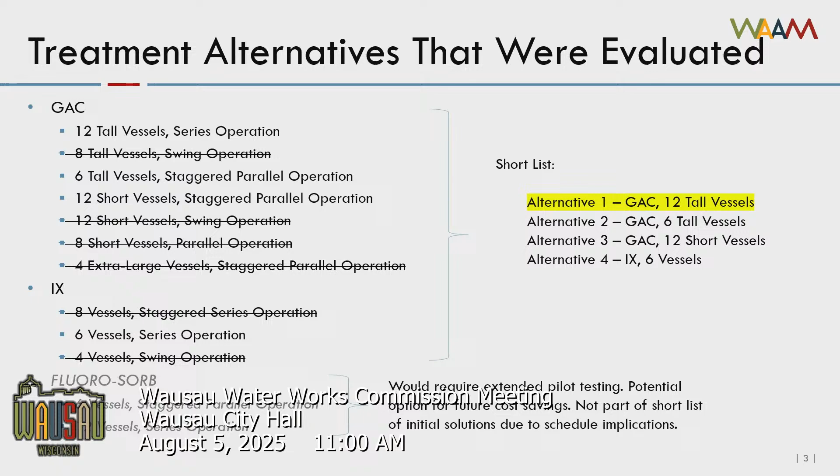Ultimately, we selected alternative one, which was 12 tall vessels for granular activated carbon. The reason for that was to give the city the most flexibility in the future, in that the tall vessels can not only use granular activated carbon, they can use ion exchange media, and they can also use some of these emerging adsorbents like Fluoro-Sorb. And the one thing with the Fluoro-Sorb is what we're being told right now is that costs are potentially less than granular activated carbon. It just has not been used in Wisconsin yet.

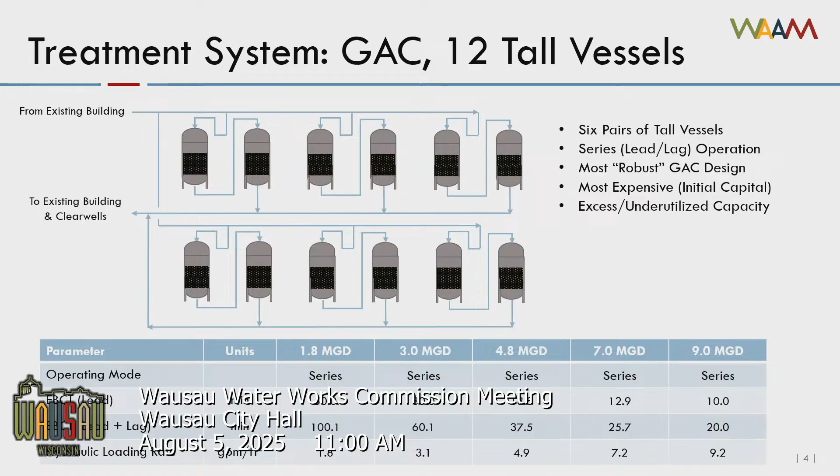So the treatment system that is in place that was started up last November has the 12 tall vessels. This just shows a little more detail on it. The water comes in from the existing treatment train and the ion exchange system. The ion exchange system is there to remove the color in the water and also the total organic carbon. And it was used on an interim basis to remove PFAS.

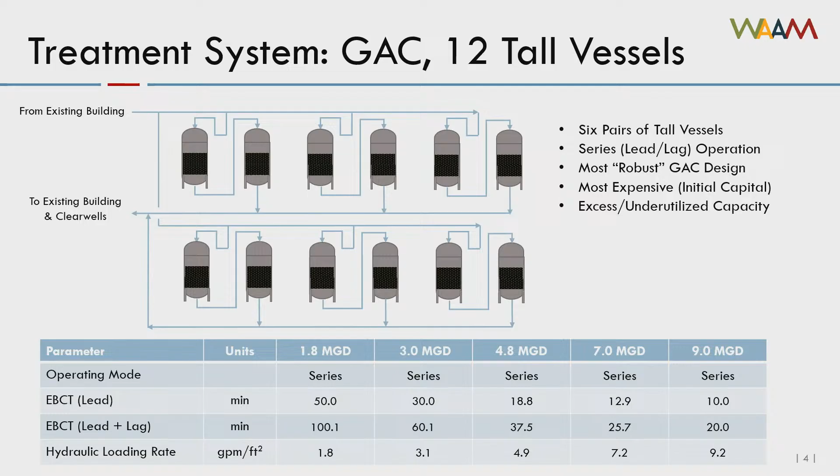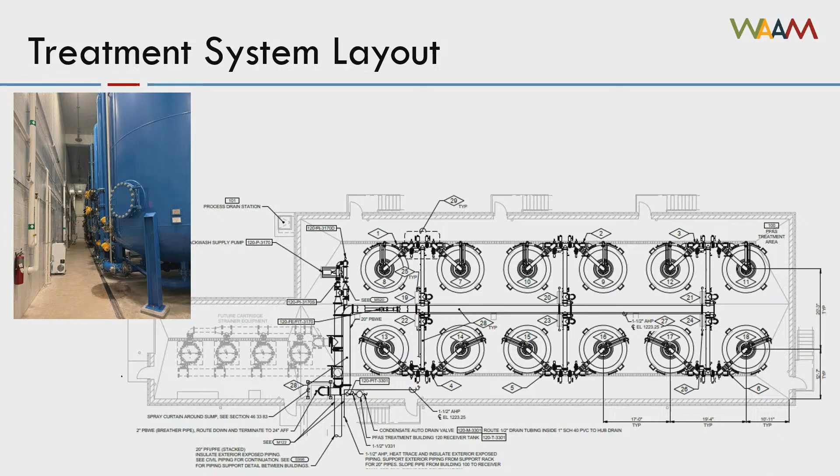This just gives you an idea of what the vessels actually look like. They're really hard to take a big picture of because they're pretty big. But there are 12 vessels right now in the new treatment facility that was constructed adjacent to the existing drinking water plant building. Those treatment vessels operate in a lead lag configuration.

So what that means is that from the ion exchange system, the water goes into each one of the 6 pairs of vessels, and the lead vessel is what we call the working bed. And then a second vessel, the lag vessel. You can see the flow path there. So the water comes in, it goes into, for example, vessel 1A. That's what we call the lead vessel, and then goes to vessel 1B, which is the lag vessel.

We are monitoring throughout the vessel beds. Right now, our focus is primarily on that first lead vessel because that's where the removal is happening, although some PFAS is still going into and will ultimately load the lag bed.

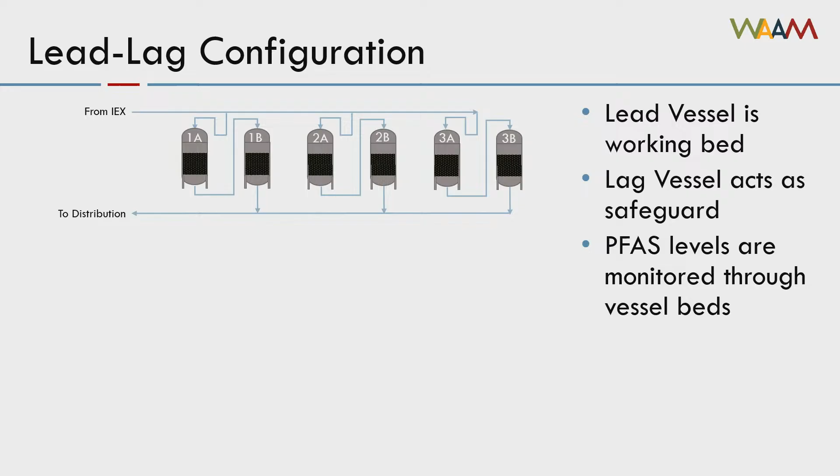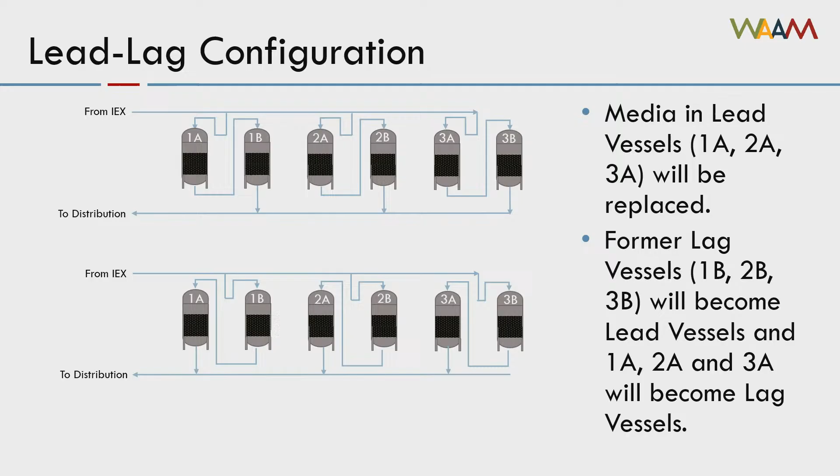So this is just showing what happens when we change things over. With the lead lag operation, once you replace the media from vessel 1A, for example, then the flow is basically reversed so that 1B becomes the lead vessel and 1A then is the lag vessel. So you're always just flip-flopping that operation.

This depicts the sampling strategy that we're using, and you'll see some references in the presentation to where those sample ports are located. There are 4 sample ports for each vessel. The numbers depict the bed depth, so 25, 50, 75%, and then 100%, which is all the way through the bed of the carbon.

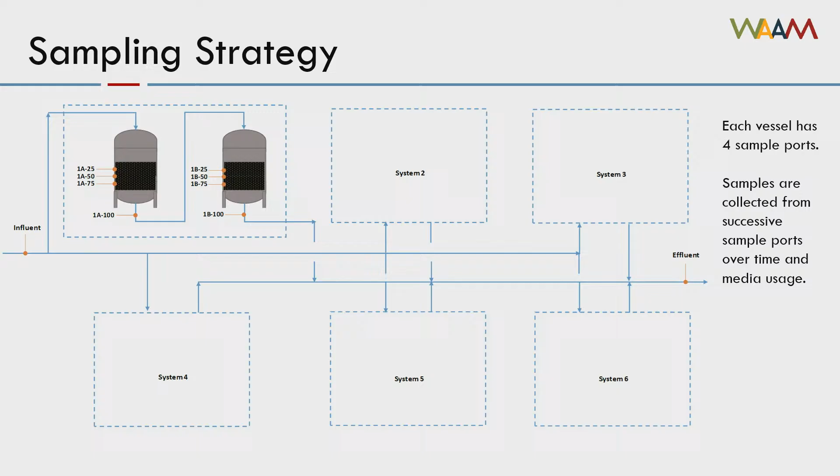And so the sampling has been going on for months now, and on a monthly basis, the samples are collected from a series of ports, depending on where we're seeing the PFAS levels advance through the vessel.

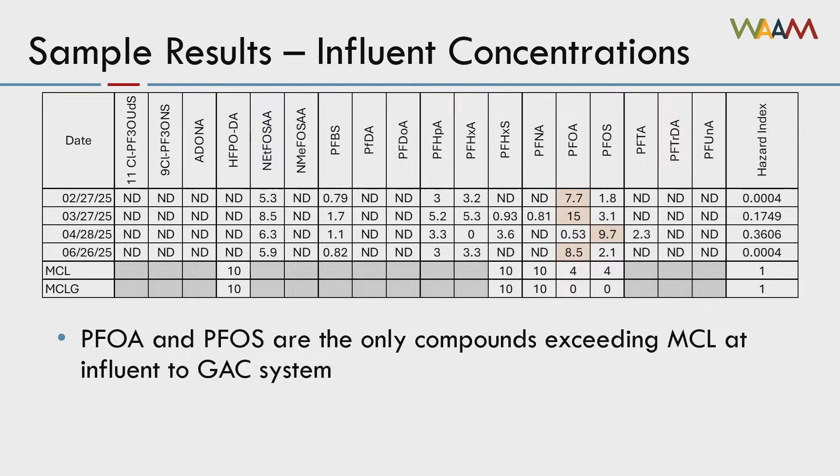This slide is just showing some observations on the different compounds that we're sampling for. There's 18 compounds that are sampled for at each location. What we're really seeing is the PFOA and PFOS that's coming through. And I was just curious, some of these compounds have different number of carbons with them, and so generally the thought process is that the shorter carbon chain compounds will break through first.

And so I was just kind of curious, and that's all the slide is depicting, is just we are seeing the PFOA and PFOS coming through the bed, but we're not seeing some other compounds come through the bed.

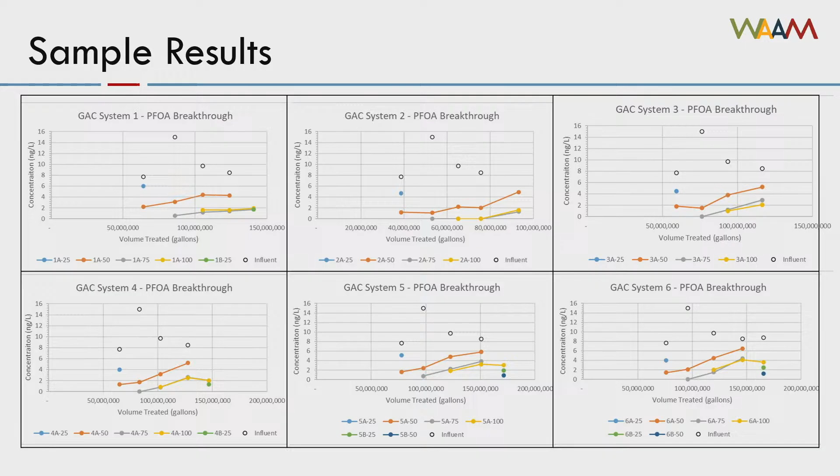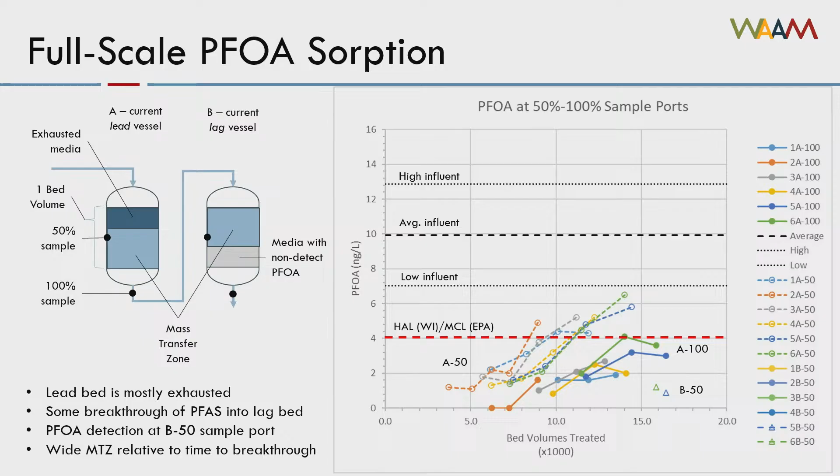And so this next graph is really just trying to show what we're trying to track, which is how many bed volumes, or how much water can we move through each vessel and still effectively remove the PFAS. But of course, the big question is, well, to what level are you removing it? Is it non-detect? Is it 4? Obviously 20, as you saw in the influent samples, we don't have anything over 20, so that's not of concern.

But that's a discussion we need to have. We're getting to the point of needing to think about replacing the media, and what is our goal here is really the question.

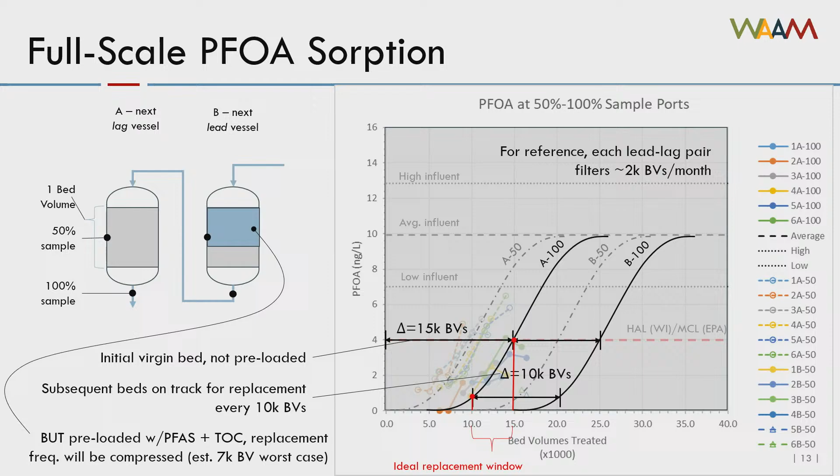I did talk with DNR. Right now, you would only be required to public notice if you exceeded 20 parts per trillion, which is the health advisory level that was most recently adopted in Wisconsin for PFOA and PFOS. They are expecting that to change, of course, but their big concern is not to get ahead of where EPA is with their rulemaking. And of course, we've recently heard that EPA is anticipating kind of backing off on their timeline, which was discussed.

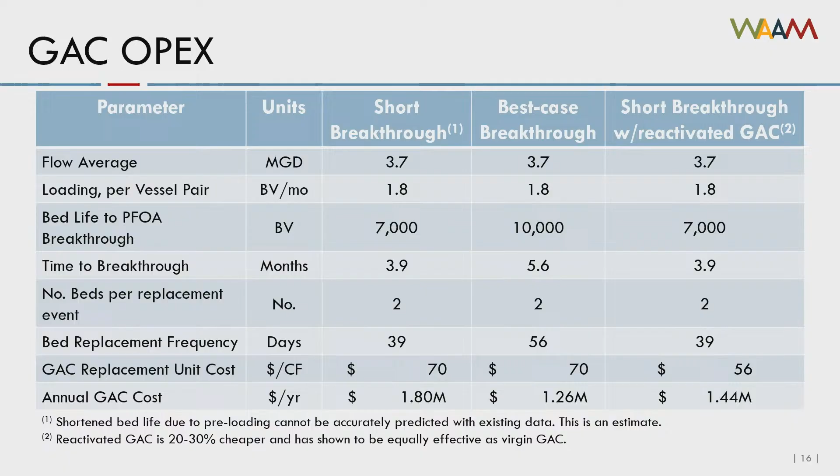The column on the left, the short breakthrough, is really the worst case, and then the best case. So we're somewhere around $1.3 to $1.8 million, and that's to replace all 12 vessels, all the carbon in them. With reactivated carbon, we would expect to see a 20 to 30% savings. So that's where the 1.44 million comes in, a lesser cost for that reactivated product. I feel like I've thrown a lot of information at you here. I'm happy to go back to any slides and answer questions or delve into something more deeply.

Yeah, thanks, Susan. Because this is such a significant cost to the ratepayers, we want to have the commission involved in determining: we as staff monitor this as we go through, and once we see 4 parts per trillion breakthrough, is that when we schedule the carbon replacement? Do we do it before the 4?

When we were going through this, obviously there was significant public input. People were nervous, there was anxiety in the public, and a lot of it had to do with the uncertainty of where these levels were going to fall, where regulatory agencies were going to require us to be, which made it very challenging to determine what type of process to design and install. With all the discussions we had, we did follow the right process, and what we installed is correct. It's just that our operating costs, if we start replacing this more than once a year, become very significant.